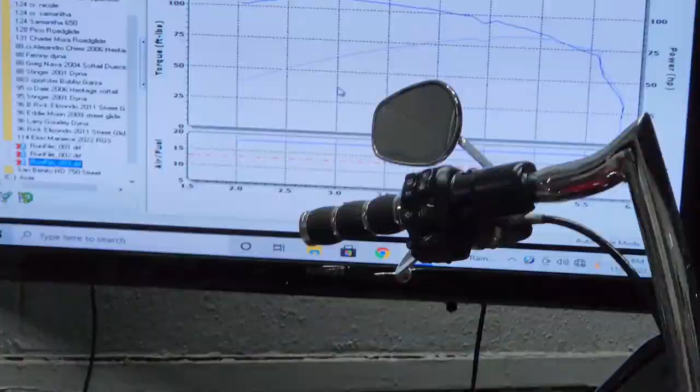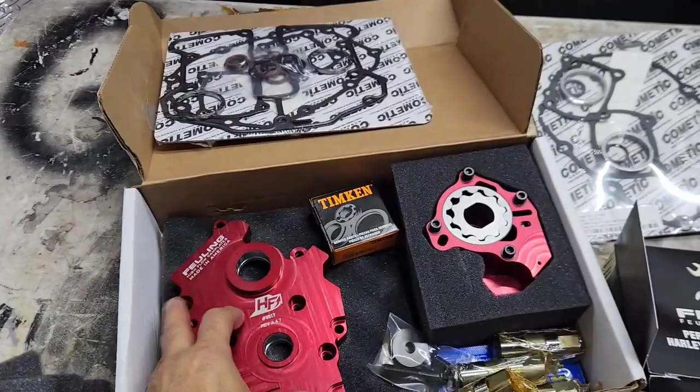So here we go with another cool motor build. So this is a 2022 Road Glide Special 114. We just did the first initial dyno run. 108 torque, 83 horses, all bare bones stock. So the customer provided us with a lot of cool parts. Feuling cam plate, oil pump, Feuling lifters, all the gaskets that we need.

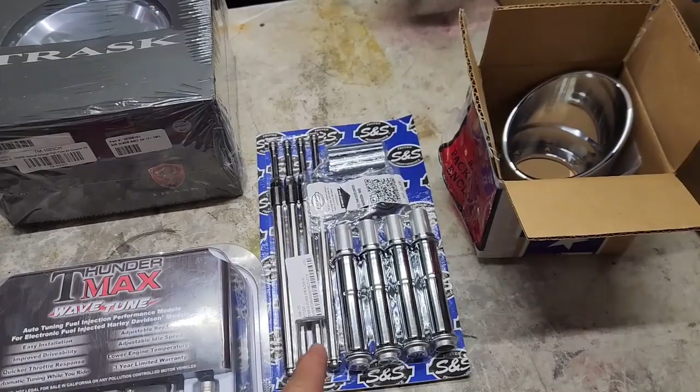Some real cool Zipper's Red Shift cams, 468s, Trask air cleaner, ThunderMax system, S&S push rods and push rod tubes, the cuffs for the lifters, of course, some amazing D&D exhaust, the chrome end cap. So we're also going to remove the stock throttle body and send it off to HPI. So we're going to order an HPI throttle body as well.

So this is going to be a cool build, guys. Continue watching this video. It's going to be a little bit of installation, a little bit of tech talk, and then get it back on the dyno, see what we can do once we get it all tuned and everything.

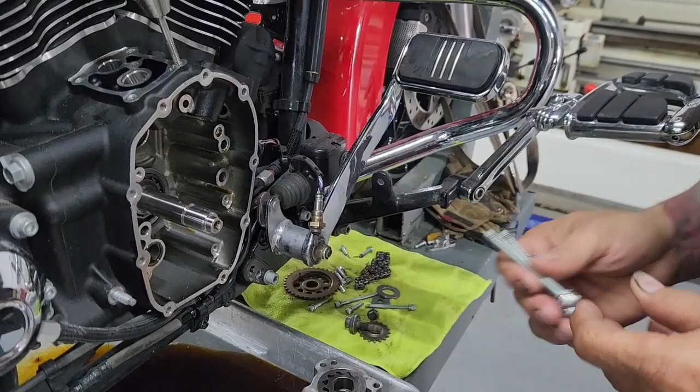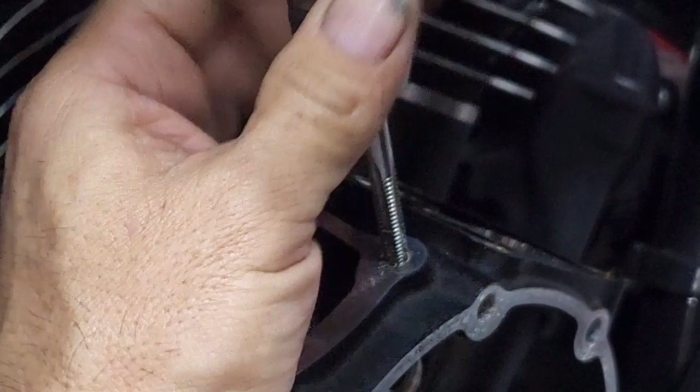So we already have all the parts washed. We already chased all the threads on the bolts. But something I want to tell you guys is it's very important that you chase and clean the threads when you start assembling. You can see how it's all grimy and dirty, the stuff that came out of there. So it's important that you do that.

This way, whenever you put Loctite, the bolt goes in correctly and it gives you the correct pounds of torque when you're trying to torque it, because if not, it gives you incorrect readings if there's garbage and stuff in there. So I also wanted to show you guys, now that we have the opportunity, the lifters.

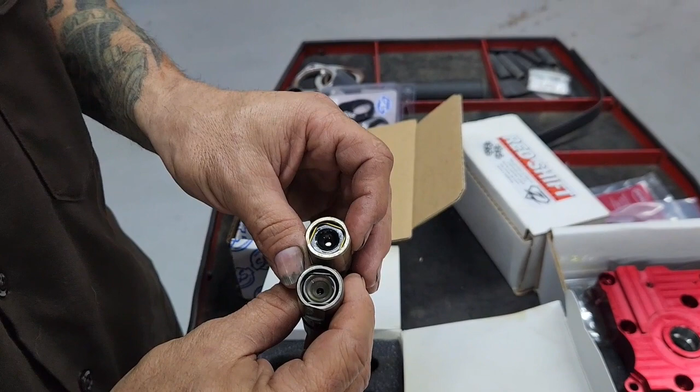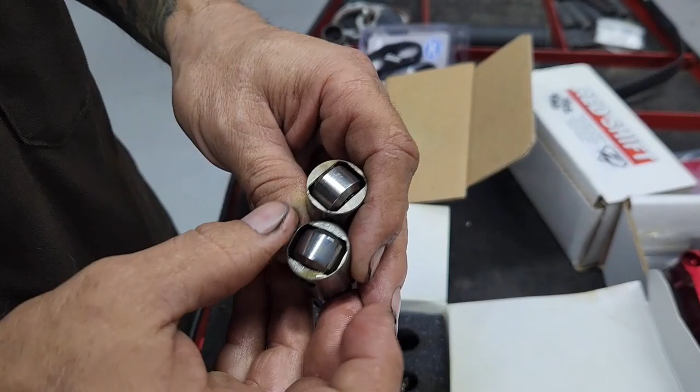The customer brought us this kit, it came with some Feuling lifters, and you can see that the Feuling lifters have a better C-clip compared to the stock factory ones. Also the stock factory ones, the hardness is already pretty worn out. So we're going to go ahead and install the Feuling ones. We're going to install a Feuling cam plate.

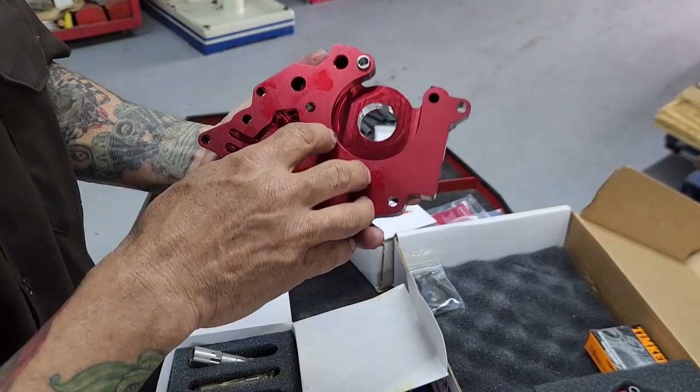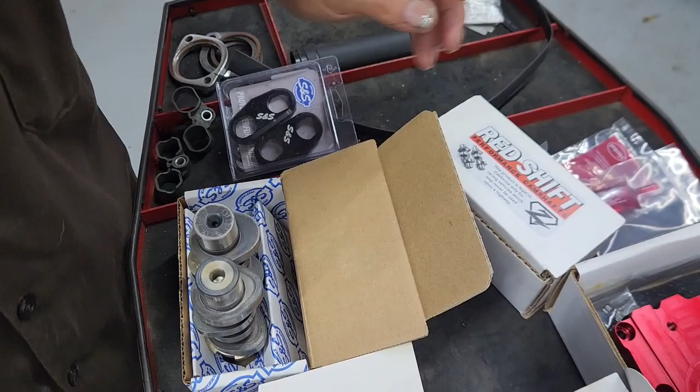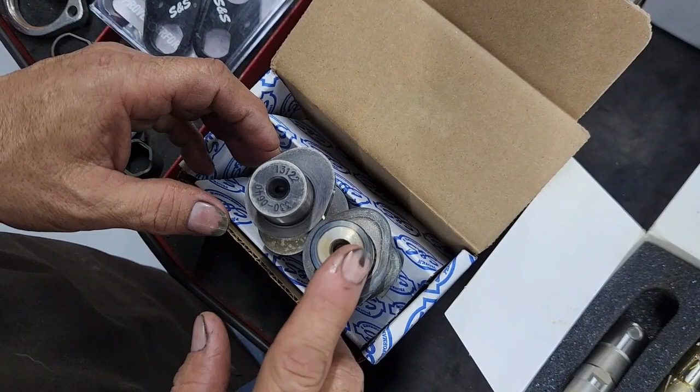Now these cam plates, we like using billet cam plates because it stiffens up the cam section area, has better flow, better oil pump. I also wanted to show you the difference. We had originally decided to go with a Redshift 468 cam. Again, the customer provided that for us, but we've been talking to the customer and decided to go with an S&S 475 cam. I just wanted to show you the difference between the stock one, the one on the right, and the S&S 475 on the left.

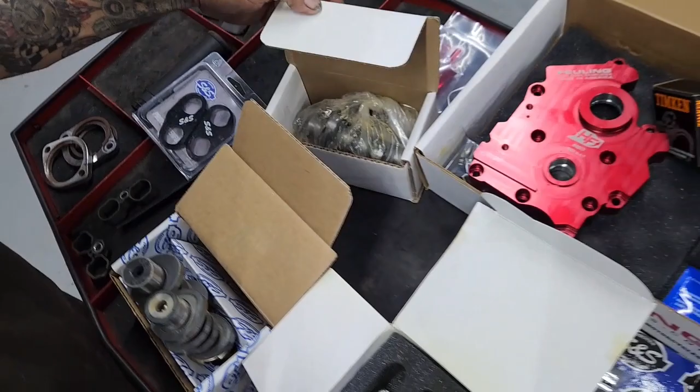You can see that the duration, the lobe is wider, leaving the valve open longer, and the height of the lobe is taller, meaning that the valve opens farther, deeper into the cylinder. Of course, we're going to use the cuffs. You've heard me talk about the reason why we use these cuffs instead of the plastic ones. So overall, this is a pretty nice kit that the customer brought. So we're going to go ahead and start assembling all this together and continue giving you guys updates as we go along.

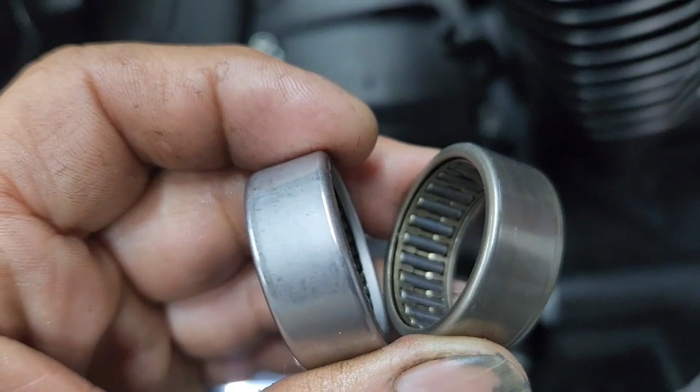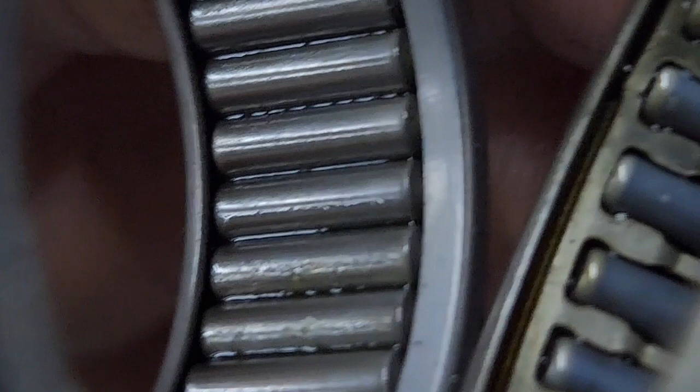All right, so we're changing the cam bearing. So again, the bearing on the left, this is a Timken brand. The one on the right is the stock factory one. You can see how it has a roller cage, and the one on the left has roller after roller after roller. You can see how the cage right there is the one on the left, which is the Timken brand. It rolls over more compared to the one on the right, which is the factory one.

So it's important, you guys, that the cam bearings are changed whenever you do a cam change. Doesn't matter the miles that the motorcycle has, it's very important. So let me go ahead and continue on this. Alright, so we have the cam installed, oil pump installed, cam plate all torqued, ready to go.

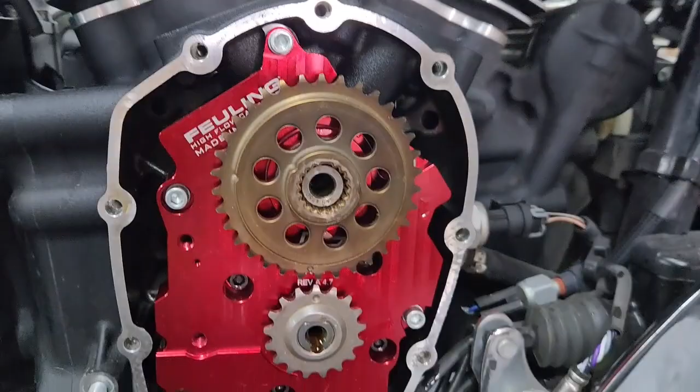Just real quick, like I've said before, the S&S cuffs come with a better grade bolt compared to the stock factory cheap bolt. The Feuling oil pump and cam plate kit come with ARP bolts, some machined washers compared to the stock washers and the stock bolts.

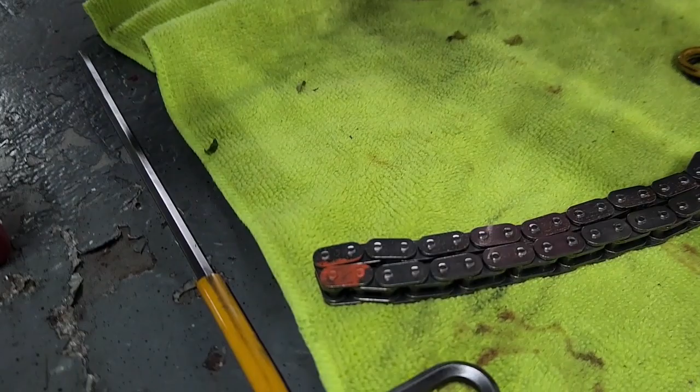As a reminder, always mark your chain so the chain goes back on the way you removed it, and that would extend the life of the chain. If you happen to put it on backwards, it will now be turning the opposite direction, so the life expectancy of the chain is going to be shortened. So next step is assemble all this and then the lifters, and we'll go from there.

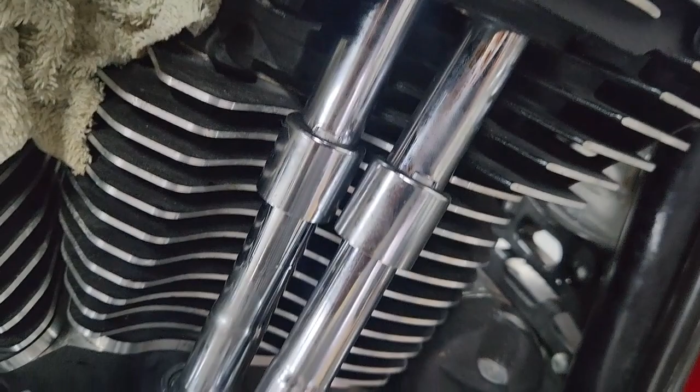Alright, so we have everything pretty much assembled. Lifters are in, S&S push rods and tubes are in, adjusted. Next step is going to be to assemble and install the D&D exhaust. So let me get with that and go from there. Alright, so we have these things unwrapped already. I have to say that they're very, very well packaged.

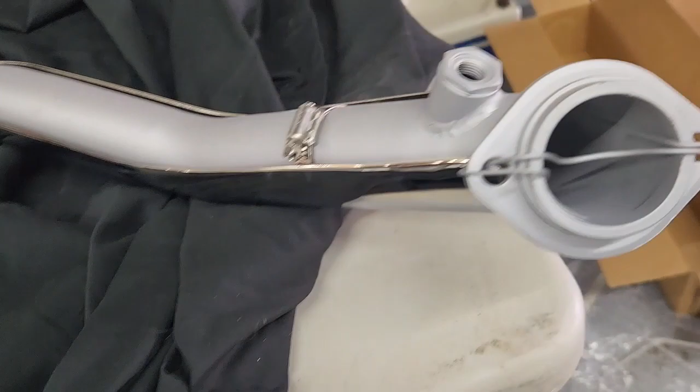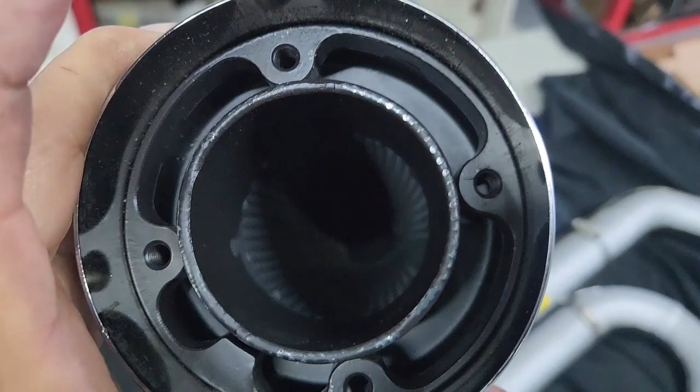I also want to say they've been Cerakoted. Real nice. Already comes with the exhaust mounts or flanges. So these here have an open baffle. Let's see if I can light these.

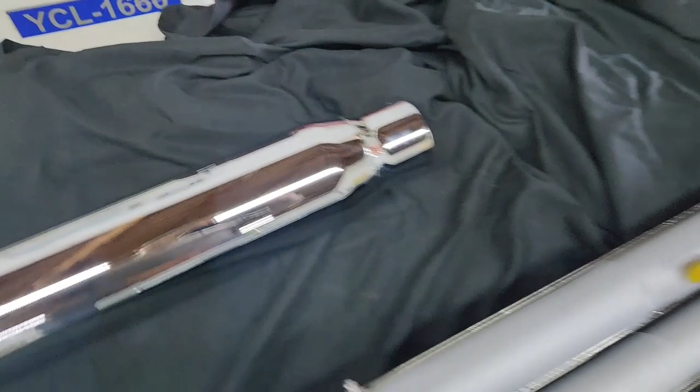Looks like this one does not have packing in the inside. So that mount right there is machined and then bolted in. So there's no breaking or coming loose. These things are very, very well made. They're gonna sound amazing also.

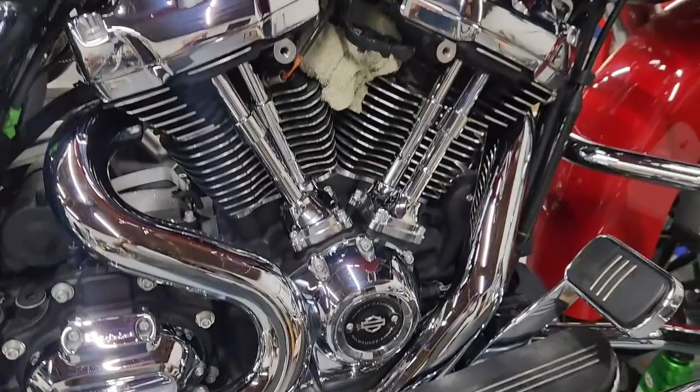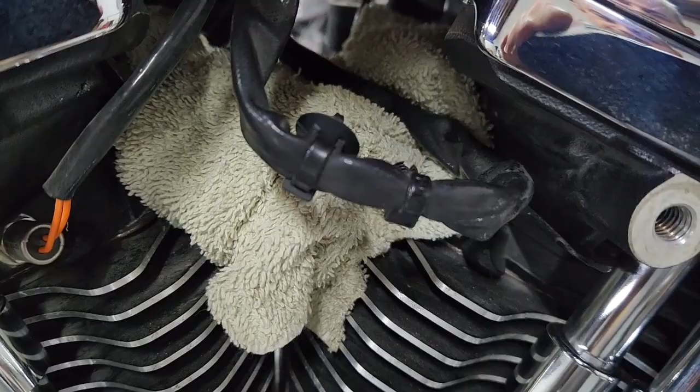Alright, so we have everything pretty much done. Just finished doing the D&D exhaust. Just finished installing the ThunderMax. Next thing is we're waiting for the throttle body from HPI, and then we'll get that installed and then start doing the dyno tuning. So for now we wait.

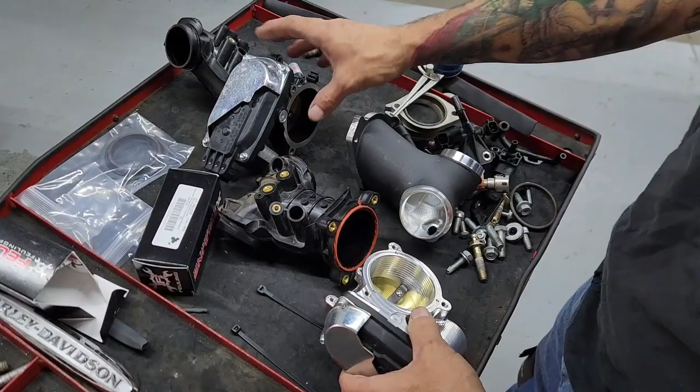Alright, so I want to talk a little bit about the throttle body. So we sent off his original throttle body to HPI. What they did is they removed all the internals, all the electronics, the gears and stuff, and they put it here, and then they recalibrated. You do not get your original throttle body back, which is plastic. You don't even want it. So what I want to show you is the difference in between the throttle bodies and the manifolds.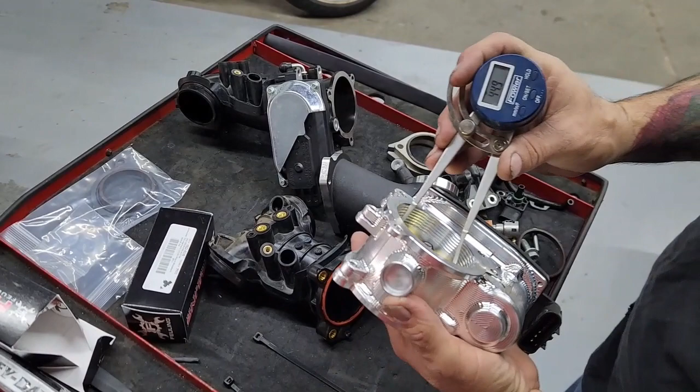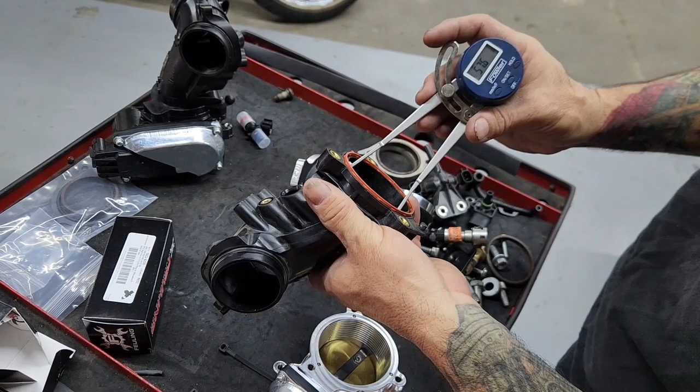So what we're going to do is, first of all, you will see how this one here is right at 58 millimeter. And then the factory one is 54 millimeter. And then, so this throttle body here belongs to another project that we're working on. So the inside of the stock throttle body, which is the plastic one, you're looking at 57. And then the HPI one, you're looking at 62. So quite a bit of difference. And this one's all been CNC ported as well.

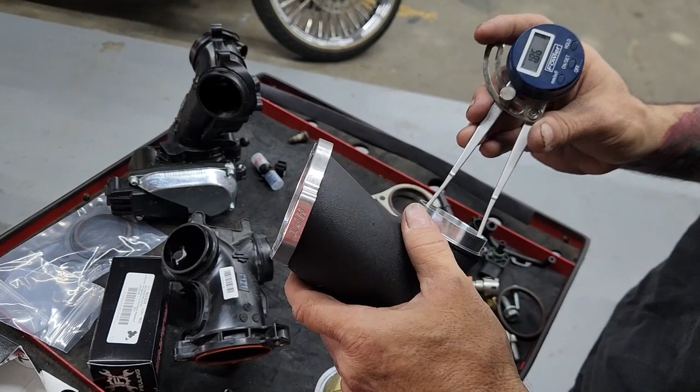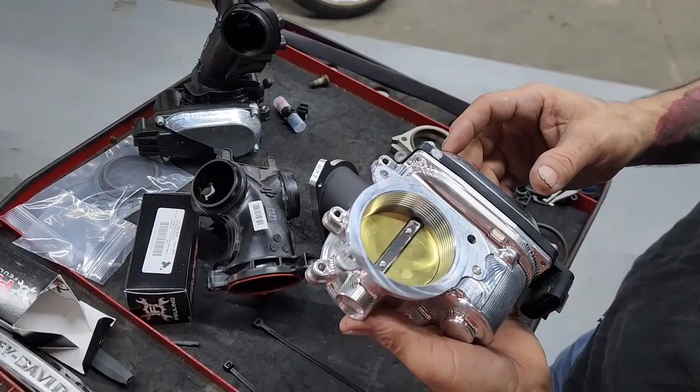So what I'll do is I'm going to switch this over to inches. And the stock plastic one is 1.79. And then the CNC ported one from HPI is 1.86. So quite a bit of difference in size, which lets more air in and gives you a little bit more performance, fuel economy, and throttle response.

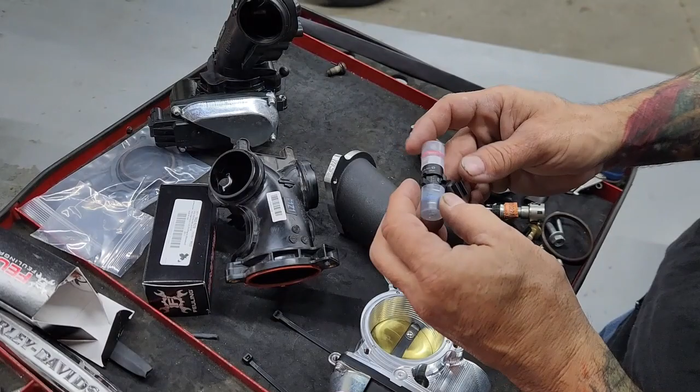So the next step is to go ahead and install all this. We ended up using some Feuling 6.1 injectors, and of course we have all our new intake seals and gaskets, the O-ring, and we're going to go ahead and install that. Then we're going to install the Trask air cleaner and then get ready to put it on the dyno.

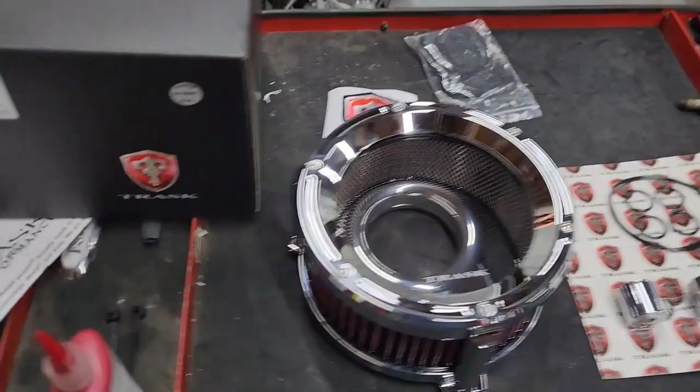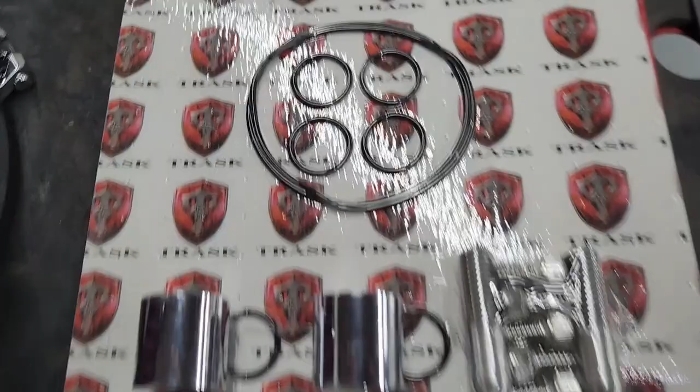Alright, so we're getting ready to install the Trask air cleaner. This is the Trask Assault. I do have to say that it's very, very well packaged. Make sure you read the instructions, because these O-rings go to a certain place and these O-rings go to a certain place. But I do have to say that it was well boxed. Everything was nice and packaged up. So I'm going to go ahead and get this installed, and then we'll get the motorcycle started.

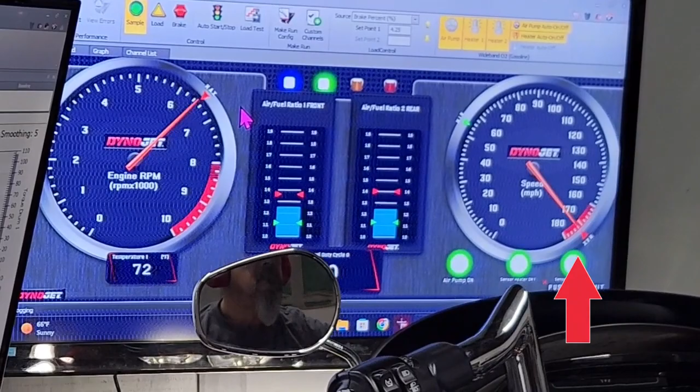I just finished doing the dyno tuning on Elon's motorcycle. We're very excited with the numbers we got. I think and believe that installing the HPI throttle body is what made the difference for us to jump from the 117 horses to the 124. We got crazy numbers on the torque as well, so we're pretty happy with that. Let me show you the graphs to show you the before and after.

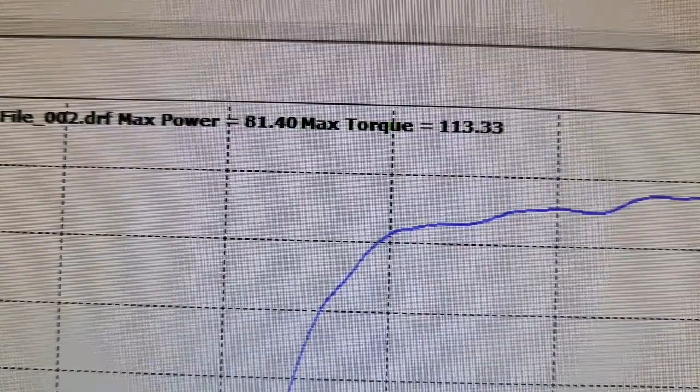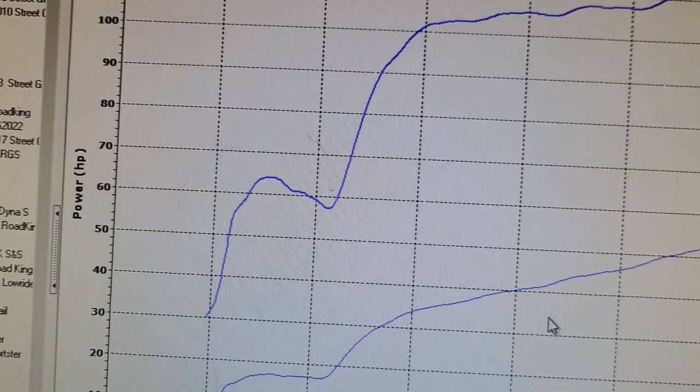Okay, so here is the before graph. If you notice, we ended up with 81 horses, 113 torque. Our air fuel ratio was straight because we could not probe it because it had the stock exhaust pipes. You can see the torque had a little bad dip there and then had a bunch of little wavy lines.

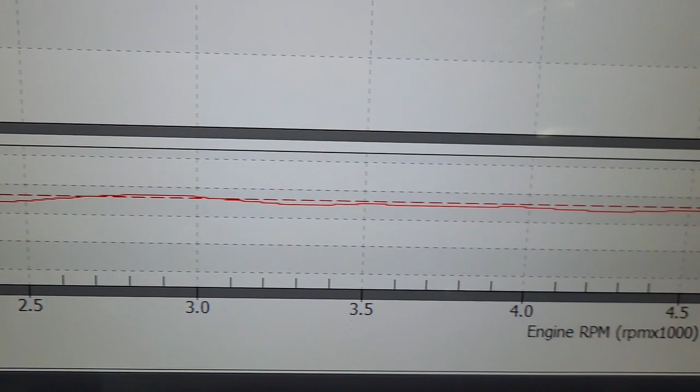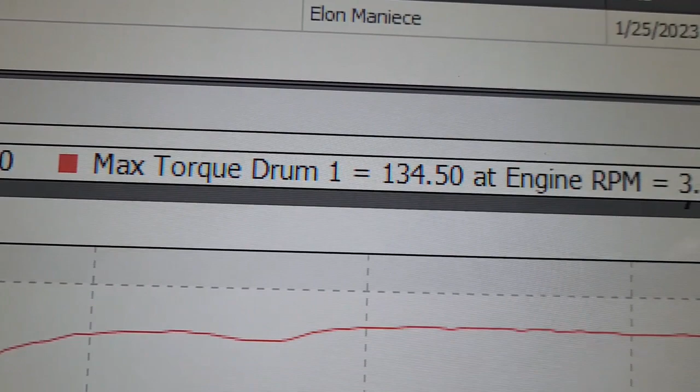So that was our before, and now that we did a little bit of tuning, our air fuel ratio is pretty straight, runs a little rich there towards the end. Very happy. 124.45 horses, 134.5 torque. There's our graph.

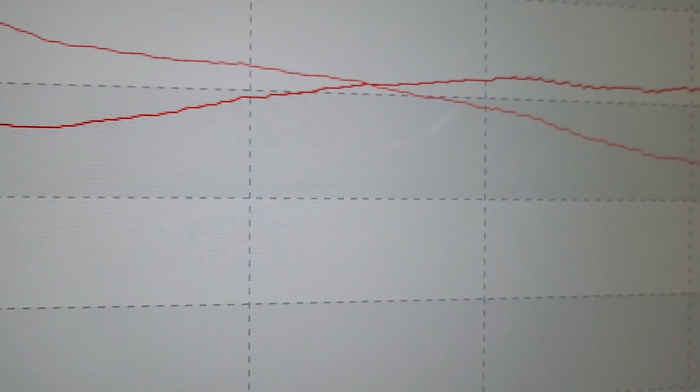Very, very excited. Here towards the end, you can see where the clutches are slipping a little bit. But you're talking about 150, 175 miles an hour there. Pretty wide open, somewhere around 5,500, 6,000 RPMs. Clutches start slipping a little bit. Overall, we're very, very impressed with these numbers.